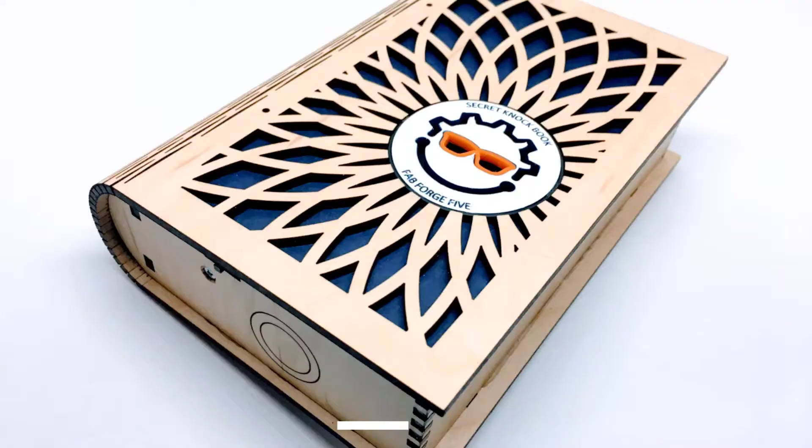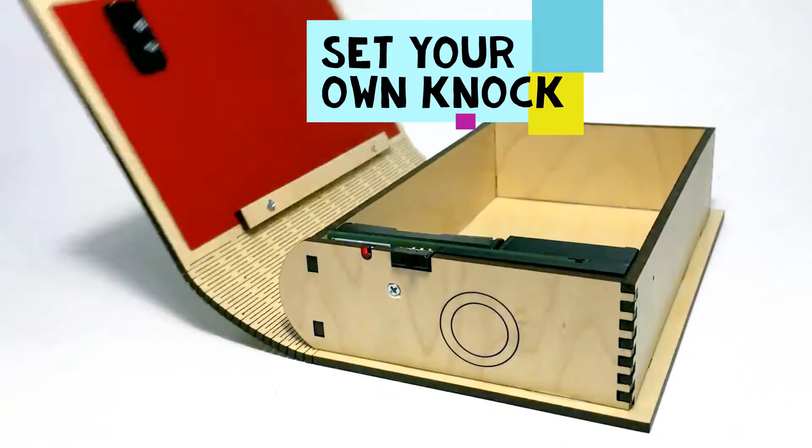We'll start a new project today. It's a custom-made secret knock book. It only opens when its user taps their custom secret knock. It has a lot of different aspects to it: 3D design, 3D printing, laser cutting, custom printed circuit board, electronics assembly, and some programming. It all comes together, I hope, in a really cool project to have some fun with. We'll see how it works. Stay tuned.

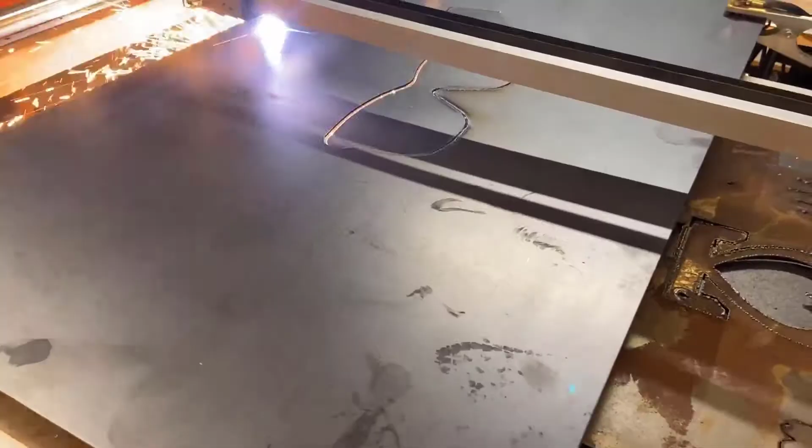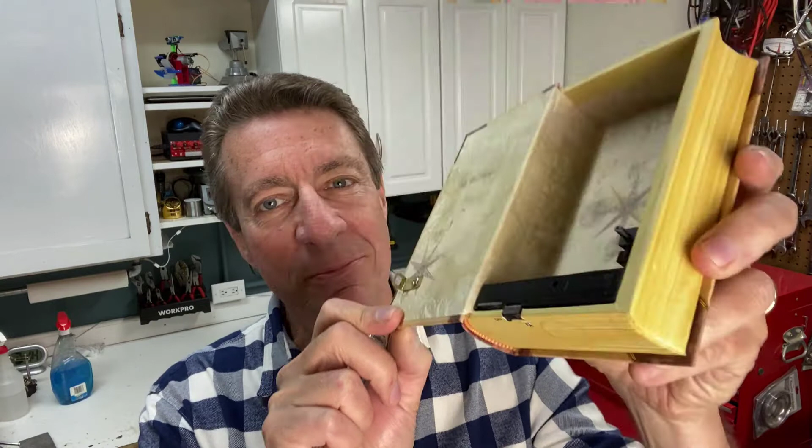All right, I built a prototype of this a while ago. So here's how it works. This is a book box I bought at a hobby store. It's got our secret knock mechanism inside it, and it works like this. There we go, it just popped open. It only opens when the latch allows it to. There's a mechanism inside it that we'll talk more about in a bit. It's battery powered, Arduino microcontroller, and it works great.

The problem is this box at the hobby store was a limited edition only. I could only buy a few of these and then they're just gone. I can't find them anywhere else. So we need to redesign our project to fit inside our own custom box. Also, to fit this box, it was a little bit tough. I had to make this small custom 3D printed battery holder to hold 3 AAA batteries, and it just barely fit, and it was tough to build this and make it work reliably every time.

Not the best thing if you want to make a bunch of these for friends and family and for different customers. So we'll redesign it and we'll have some fun. We'll see how it works. Let's get started.

Here's a look at the schematic for our secret knock book. It's pretty simple. It has an Arduino Pro Mini here, which listens for a tap or a knock with the piezo disc. It's got a small resistor here to condition the signal that comes from the disc, and then that goes into an analog input on the Arduino. It just listens all the time, and when it hears a tap or a series of taps, it decodes them to see if they match the pre-saved actual knock.

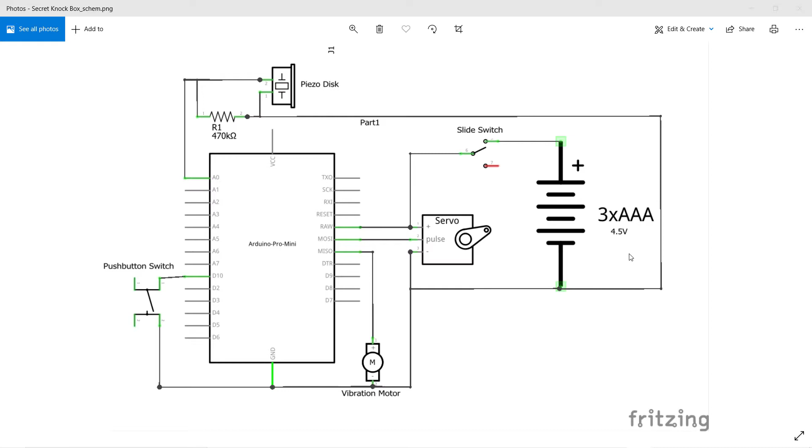And if it matches, then it turns the servo here to move the latch to open the cover. It's got a small vibration motor to interact with the user in a couple of different ways, which we'll talk about. It's also got a push button switch, which allows the user to program their own custom secret knock. And then it's got a power switch here, a little slide switch. And then of course it's powered by 3 AAA batteries for 4.5 volts. So pretty simple. So let's switch over to Fusion 360 and we will start working on our printed circuit board.

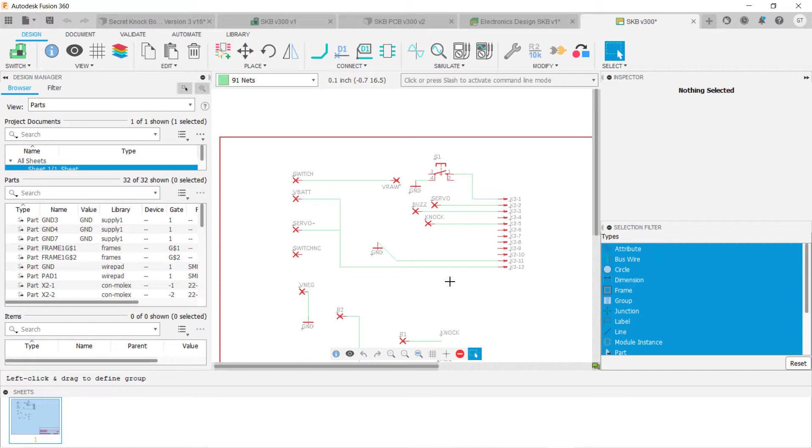So here's that schematic in the electronic design version of Fusion 360, which is also known as EagleCAD. So pretty simple. In this case, we're designing a printed circuit board that just has a number of solder pads on it that will connect to the different parts we just saw in our schematic. No actual parts mount on the printed circuit board. Well, I'll explain that more as we go. But here's the schematic, and then here is the resulting printed circuit board.

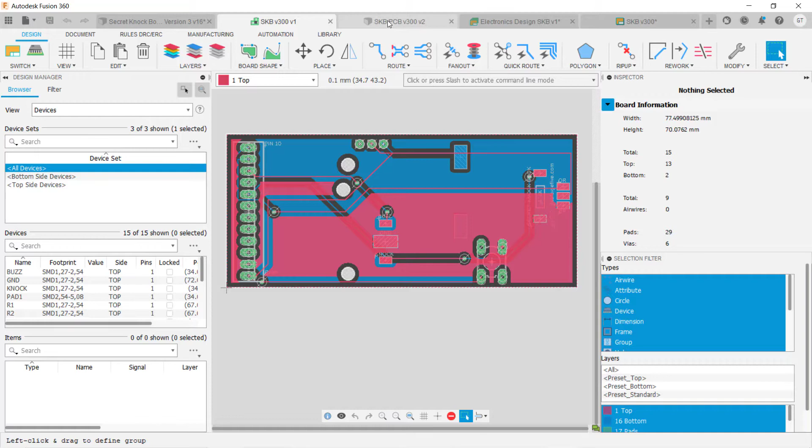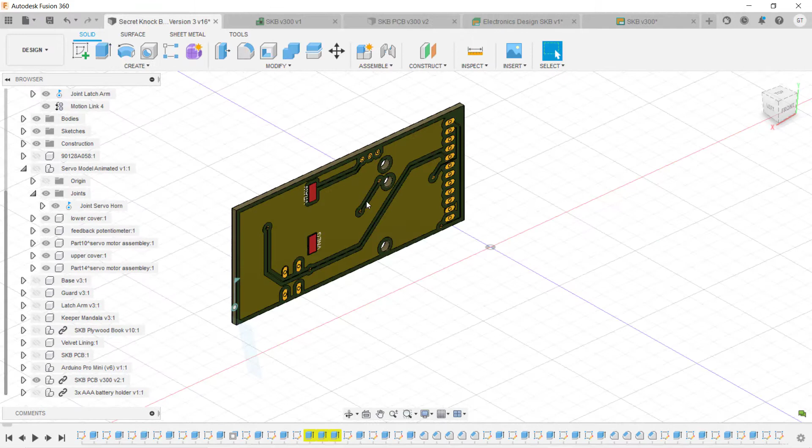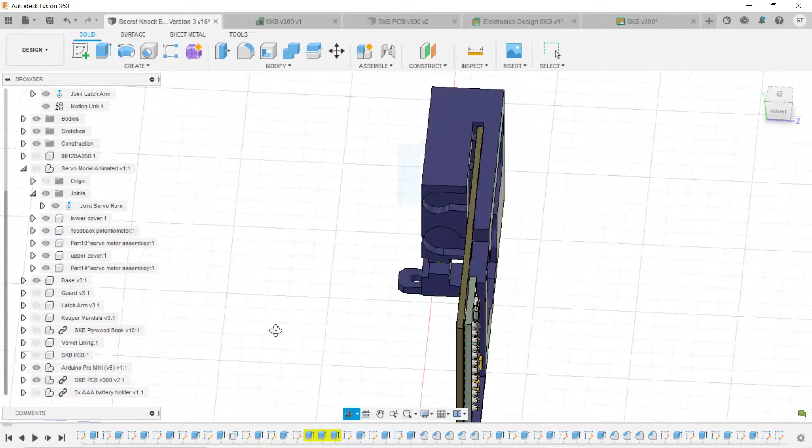So now let's take a look at where we put this board in our overall design. So we'll switch over here. So here's our printed circuit board. Now it needs to fit inside a holder or a base, which looks like this. This is a 3D printed part. The printed circuit board slides right into it. And then we have our Arduino Pro Mini right here. So it solders onto the printed circuit board and fits in this little space right here.

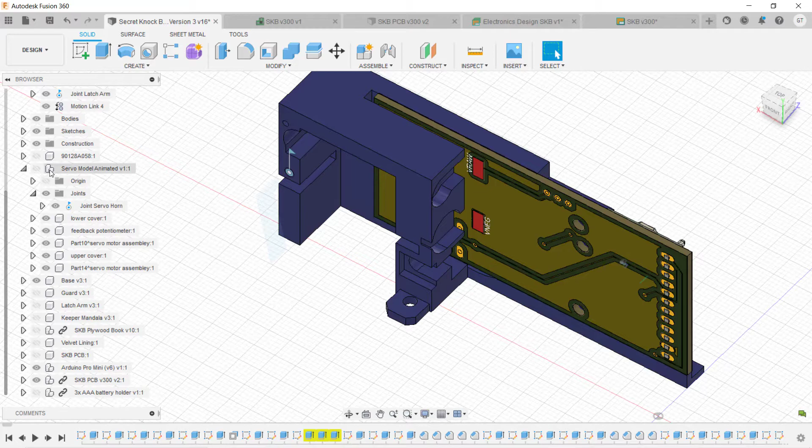Now, one thing I did when I designed this overall circuit is I'm only using pins on the Arduino for one row of connections. I don't need to use a second row. It actually saved me a lot of heartburn from adding a second row of connections on a printed circuit board. So the Arduino fits right in there. And then if we look at the different parts, let's see, for example, where our servo fits. So we'll use a little sub-micro hobby servo that fits right there in that space.

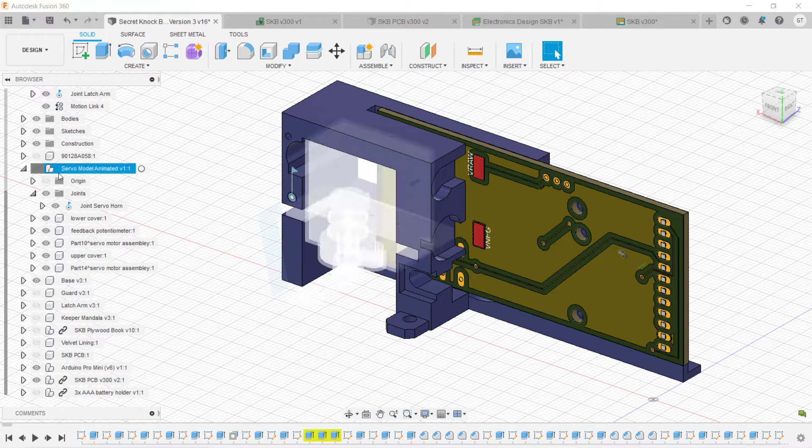And by the way, when you're designing something complex like this in Fusion 360, notice that this servo space has got a lot of little features to it, a lot of little tabs, etc. And so one great way to do that is to use the combine function.

Watch my video on the combine function to see how easy it is to carve out a void in a part using the volume of another part. It's actually really simple. So we also have a small latch arm here. That latch arm is what the servo moves and lets our book pop open.

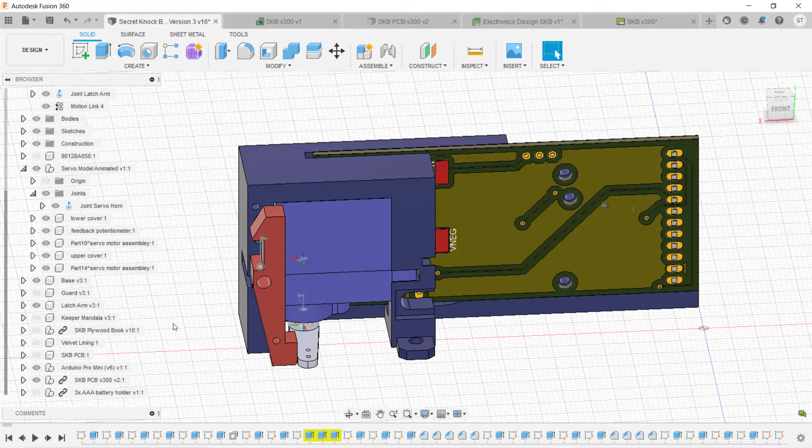And then because we're sitting at the bottom of our little book box, we also have a guard that fits over that. Just in case someone puts something inside the box, we don't want it sliding over and getting stuck inside the servo. So that stays there as well. Let's see. That's all the main key parts of our overall box design. So let's see how things move.

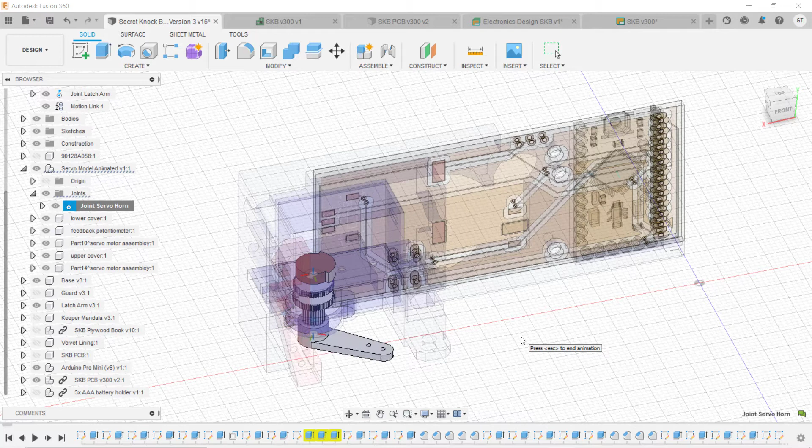So first we'll go to our servo horn and let's move this joint. So you can see that's how the servo horn moves as it spins. So there's its unlocked position, there's its locked position. All right, now let's go to our latch arm. Let's see right here, animate this, and you can see that the servo horn pushes that latch arm like this. When it unlatches right there, it allows a small metal bar to pop up.

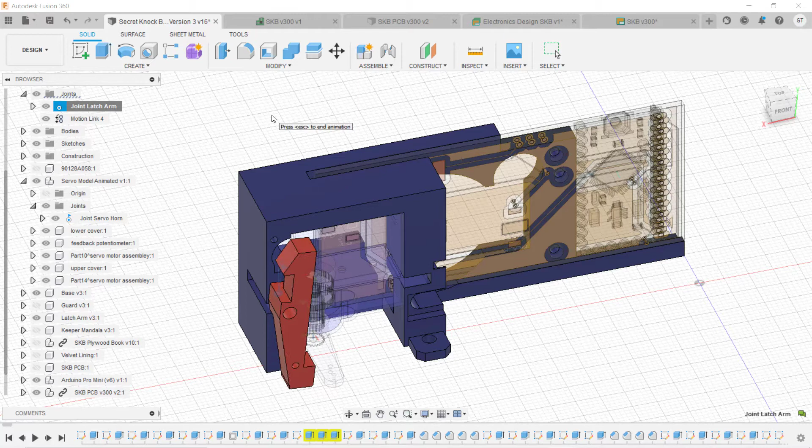All right, so now let's see how those work together. It's kind of fun in Fusion 360 to combine movement like this. So we'll say animate model. Now you can see how they move together. Not perfect, but you get the idea. All right, so that's our assembly.

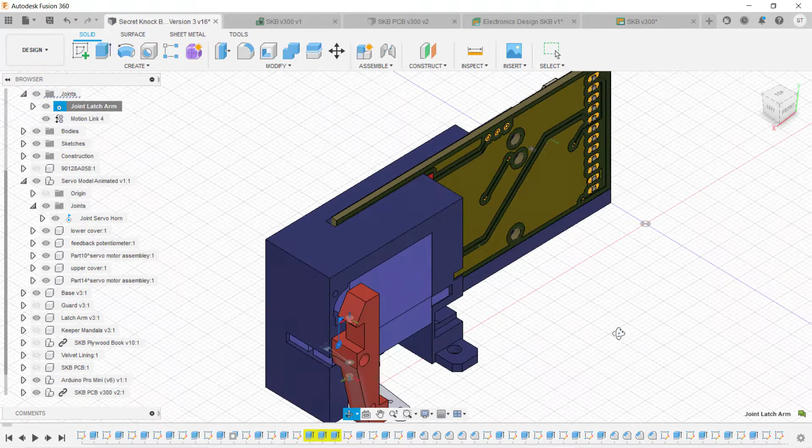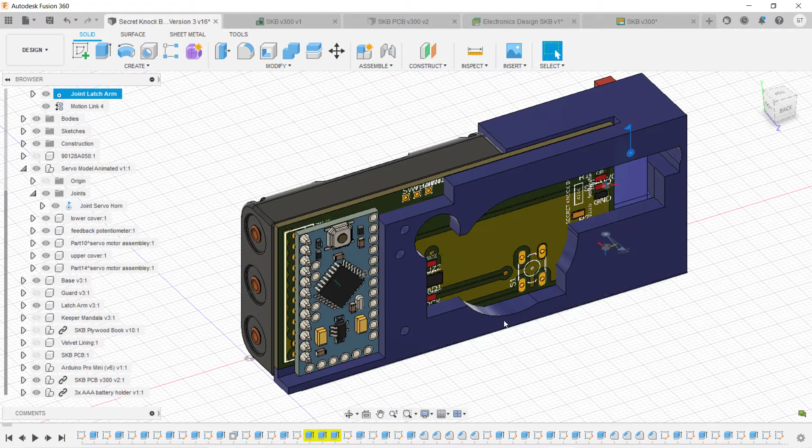Now I also have, of course, our battery holder. Fits right there into that nice little space, and it mounts with 2 screws through these 2 holes. So overall it looks like this. Now I haven't added to this model some other parts. I've got my little vibration buzzer that fits in this space. The piezo disc fits right here, and then the push button to program it fits right in this space and solders onto these 4 tabs.

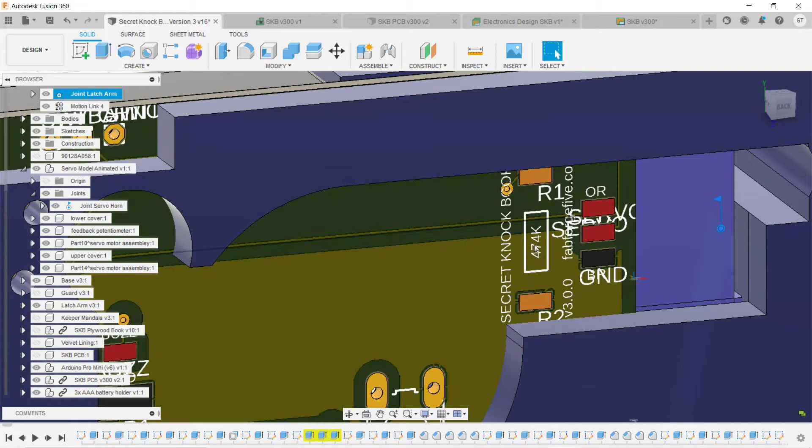And then we've got a bunch of different connections here. Our little resistor fits right across these 2 contacts, and then our servo connects to these 3 contacts. So we have some soldering space inside there. You'll see how it all fits together when I start showing you the actual parts.

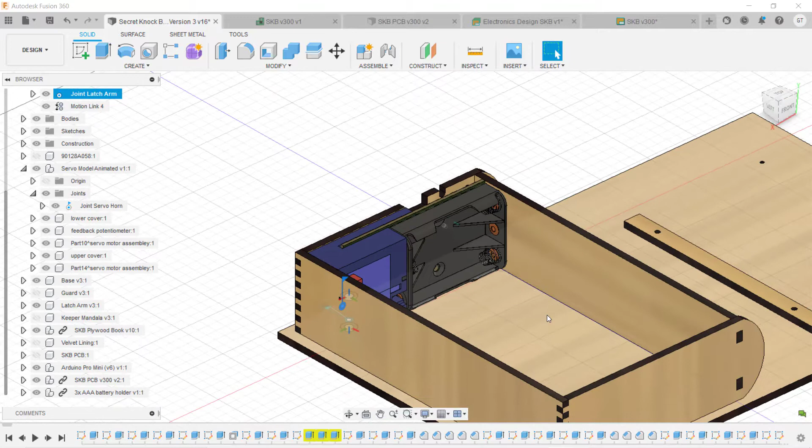Now we have to have a book for this, or a box. So we'll make that out of plywood, and it looks like, let's see if I can find it, like this. So here's our plywood box. So you can see exactly where the overall assembly fits, right there in the bottom or back of the box. So there's a space or notch for a power switch, a little window to see the flashing light on the Arduino, and a mounting hole to mount everything together. So that's how that fits.

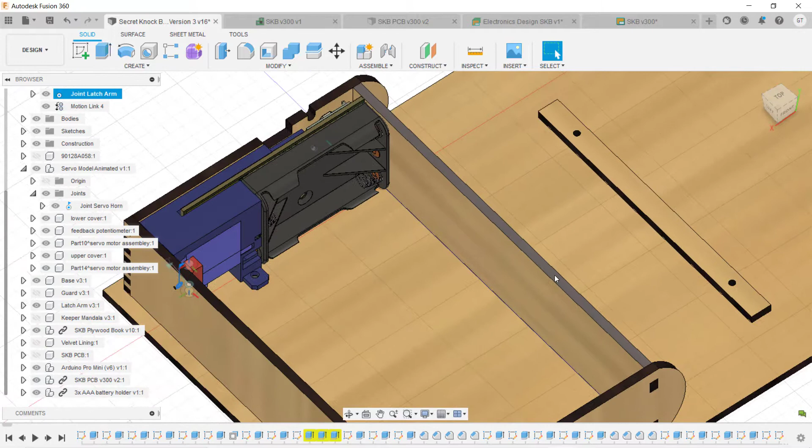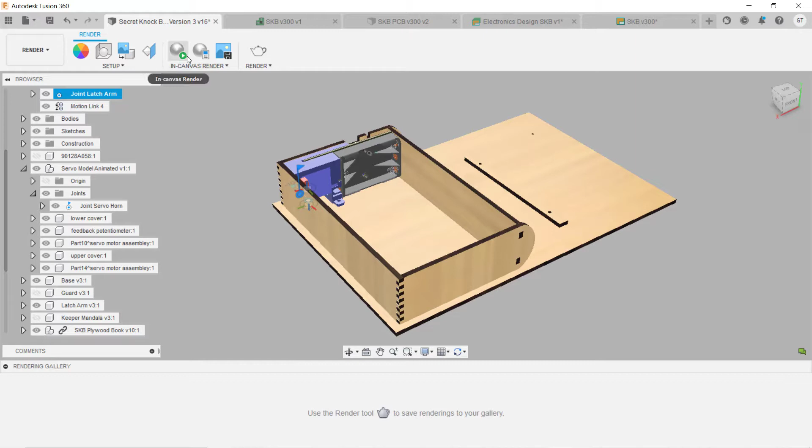Now another nice aspect of Fusion 360 is you can do photorealistic rendering. So let's do one very quickly of how this overall assembly looks. So we'll say render. That's about right there. And then we'll just start the in-canvas render process. This will just take a few seconds. You'll see it run through a bunch of ray tracing iterations as it solves the light and appearance issues.

And here's our rendering. Looks pretty good, looks pretty realistic. Gives us a sense of what the overall box will look like and how things fit. So I use photorealistic renderings all the time. I use them to upload an image to a website, to show friends or family what I'm working on, to show potential customers what the product will look like, and even to show potential investors what they might be investing in, for myself or for clients. So I highly recommend photorealistic renderings. They are great.

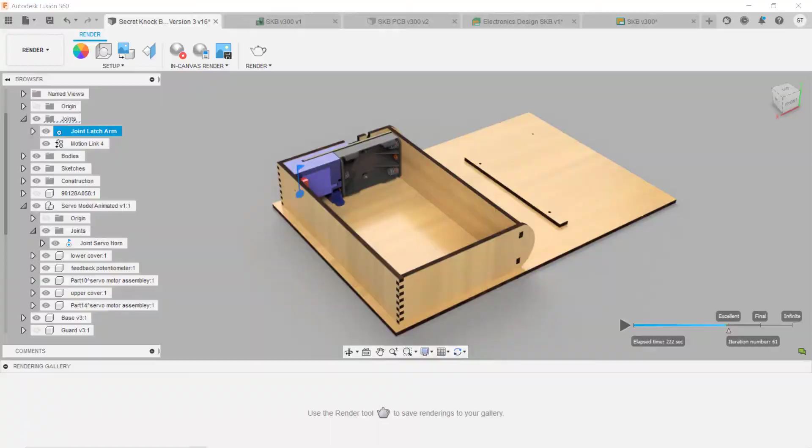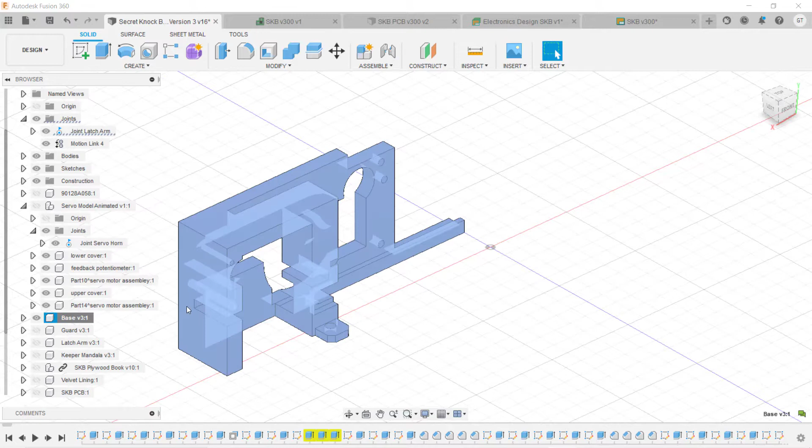So our next step is to 3D print our overall base here. So what we'll do is output an STL file. Our base looks like this. Fairly complex, but we can 3D print this, of course. That's the beauty of 3D printing. And so we'll just save that as an STL. And we'll open that up in our Prusa slicer and begin slicing this.

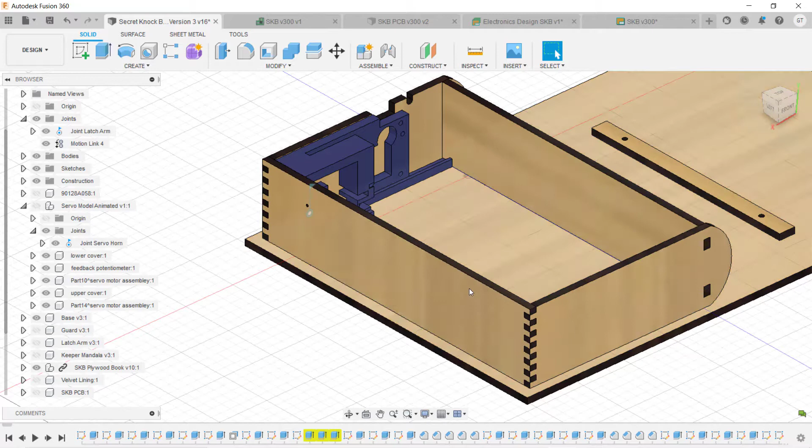And then the second step with our plywood book is to output a DXF file of each piece of this book or base. And then we'll use that DXF file for our laser cutting. That'll be the second step. We'll take a look at that as well.

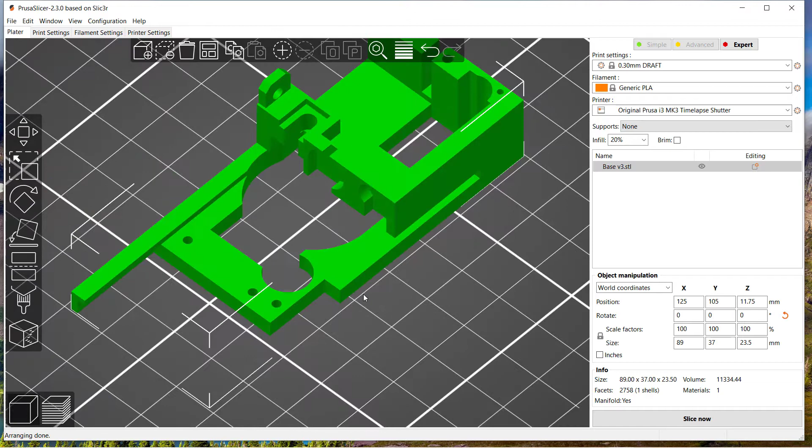Here's our base in the Prusa app in the slicer. So you can see that we definitely have some overhangs where there's nothing underneath, and since a 3D printer builds from the bottom up, we need to add some supports or scaffolds to help it build that. So let's go to our print settings. We're going to say 0.3 layer height. We will change these to 0.2.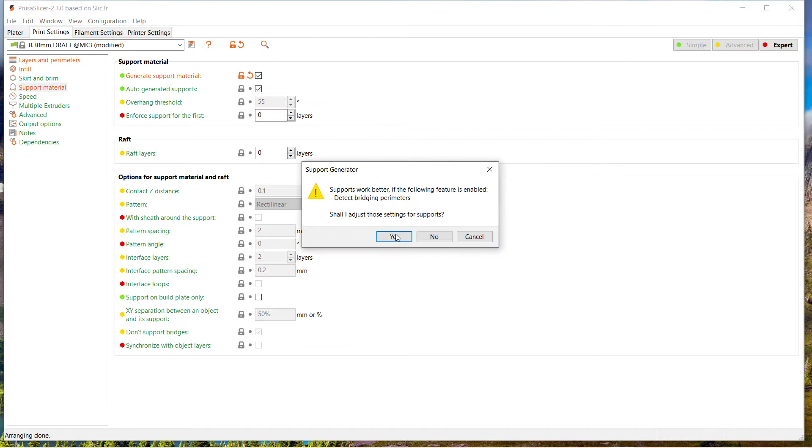I don't need a lot of horizontal shells. And then our infill, we'll say 20% is fine. I always like cubic, which is one of the nice things you can do with the PrusaSlicer. We don't need a skirt or a brim, but we definitely need support material. So we'll click right there to enable that. And there we go. Let's slice this, see how it looks.

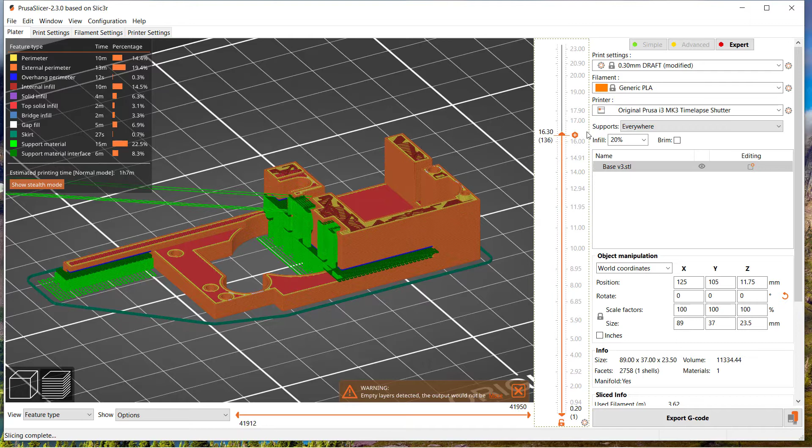There it is sliced. So we have a total of 180 layers, quite a lot. You can see how it will build itself out. Just like that. So we'll export this G-code to our 3D printer and crank up our Prusa.

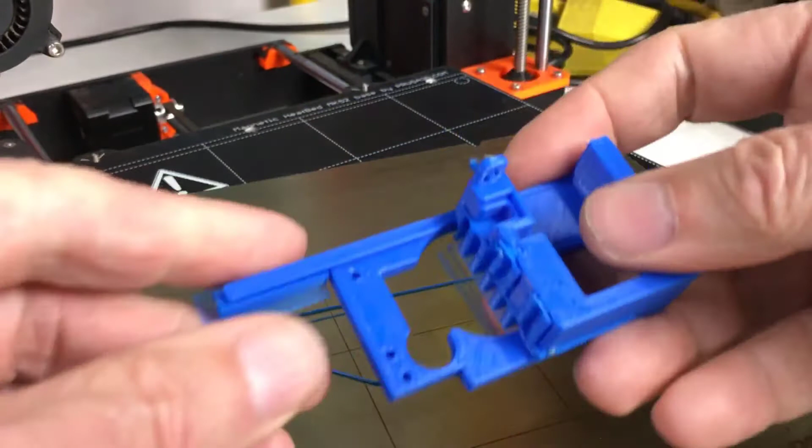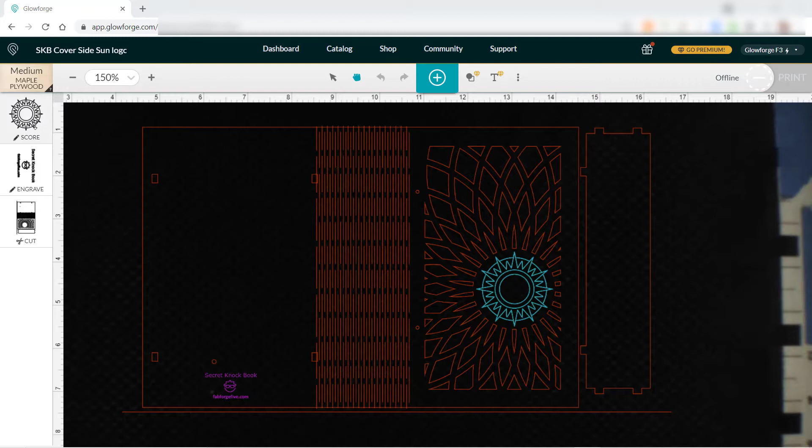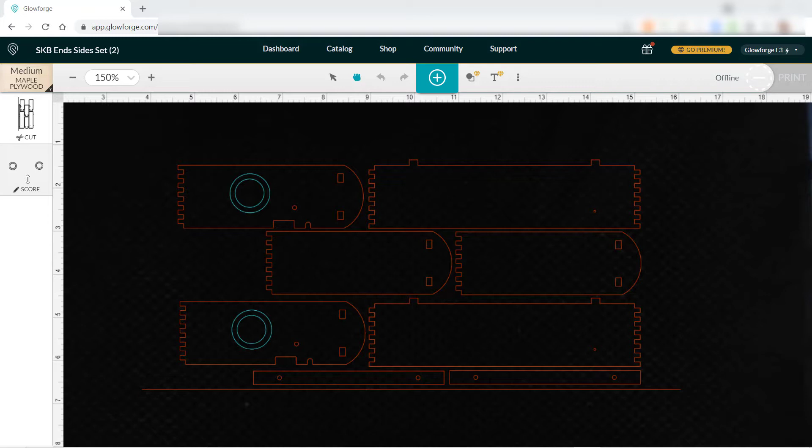And here are our ends and sides in the Glowforge app. I have enough room on the remaining sheet of plywood to make 2 sets of ends and sides. So I'll just go ahead and do that instead of wasting a piece of plywood. So here you can see these are cuts and these are scores. Those 2 circles are kind of the ideal target place to tap your secret knock. So I like those to be on the bottom ends. So we'll go ahead and cut these as well.

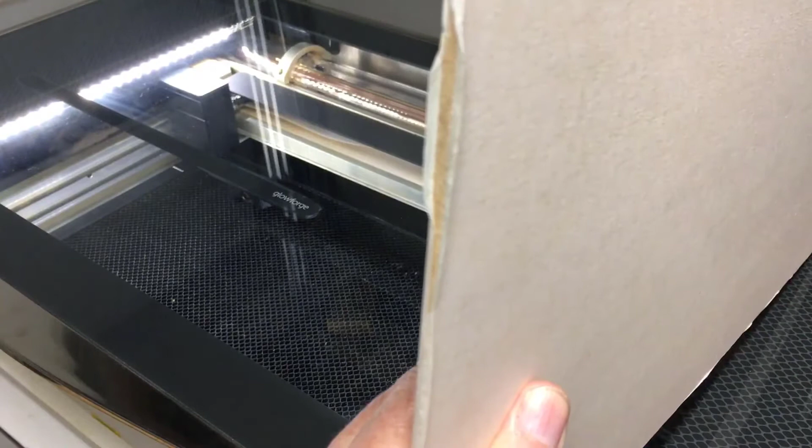We'll use some maple plywood for our laser cut wood for our case or book. And this is Proofgrade plywood from Glowforge. The nice thing about this is it has a paper backing on both sides you can peel off. That's important if you don't want scorch marks on your wood after you've laser cut it. When you peel off the backing, it makes a nice, clean, crisp laser cut. You might want scorch marks if you want something that looks rustic, and that's just fine, but I prefer to not have scorch marks. So we'll load our Glowforge and start the cut.

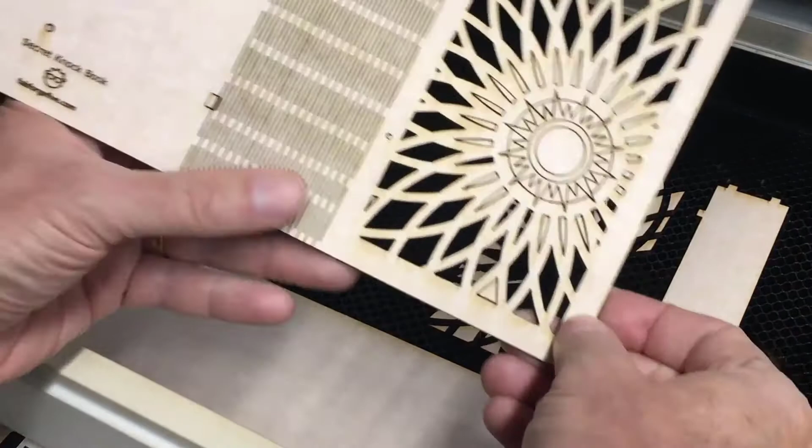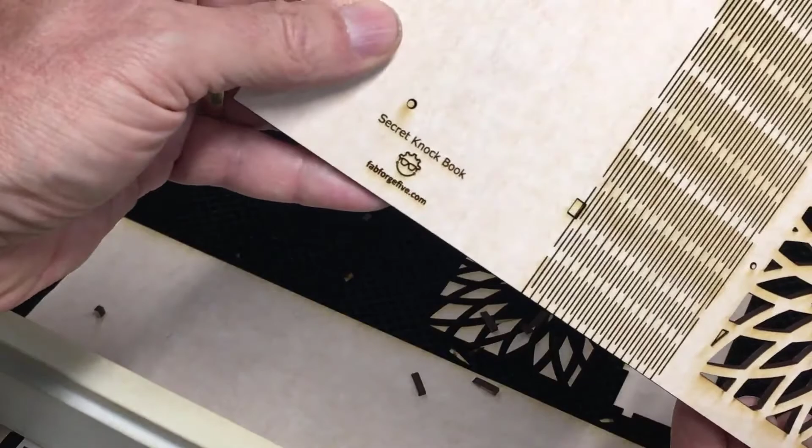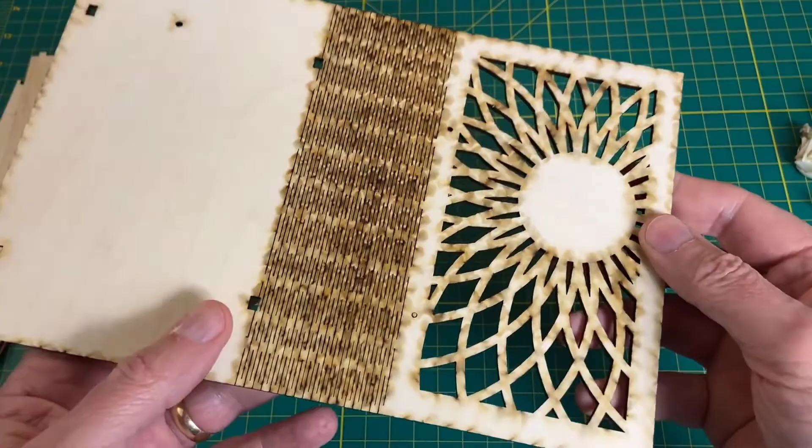Last piece to peel off. Take a quick look at the scorch marks on the paper backing here. You can see if we didn't have our paper, those marks would be on our plywood, and it's even easier to see on the bottom side. That looks actually pretty terrible, but when we peel off the backing, it will look nice and crisp. So this is the one that takes a bit of time to peel off.

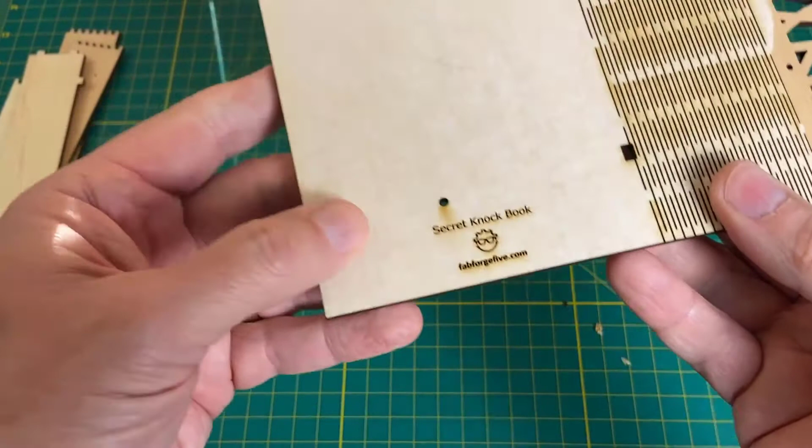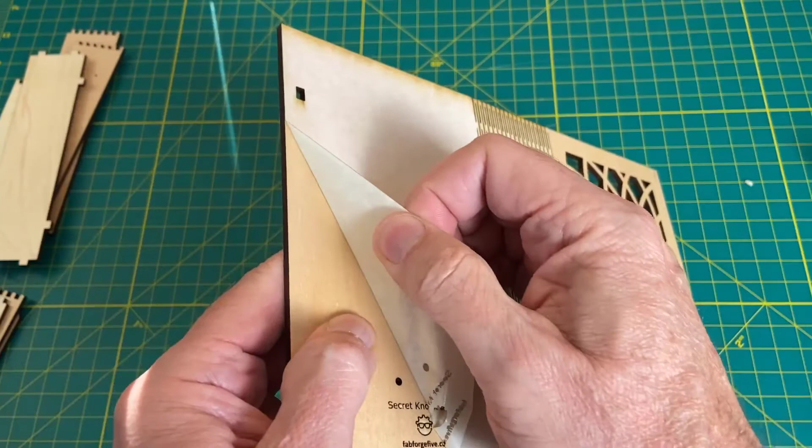Let's see, got some nice crisp edges here. I really like that. There's our engraving. We'll see how that looks when we peel it off. Looks pretty good. Now, this is the part that takes a bit of time.

How long is this gonna take? Just a few minutes. I don't have all day. I know you're busy.

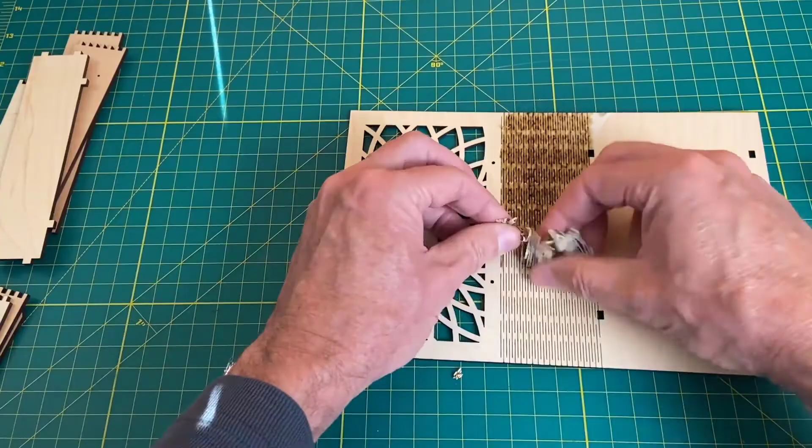That's the end result. And we'll peel off the back side. There we go, that's the back side. So here's a nice, great example of a flexible plywood hinge. And it's still got some spring to it, so the lid will spring open when the latch releases it.

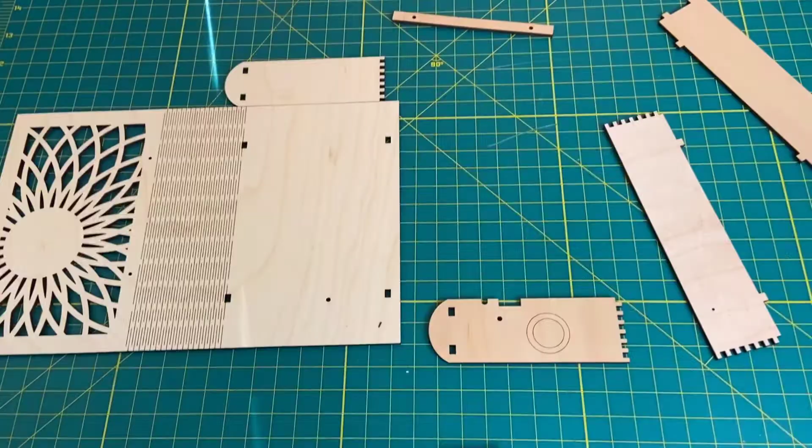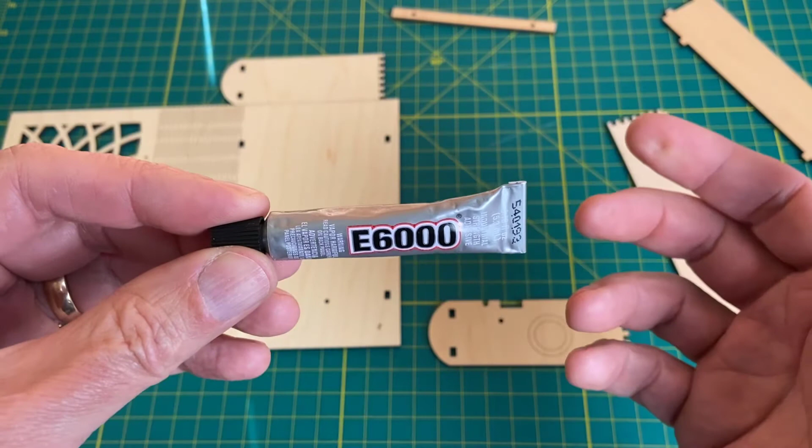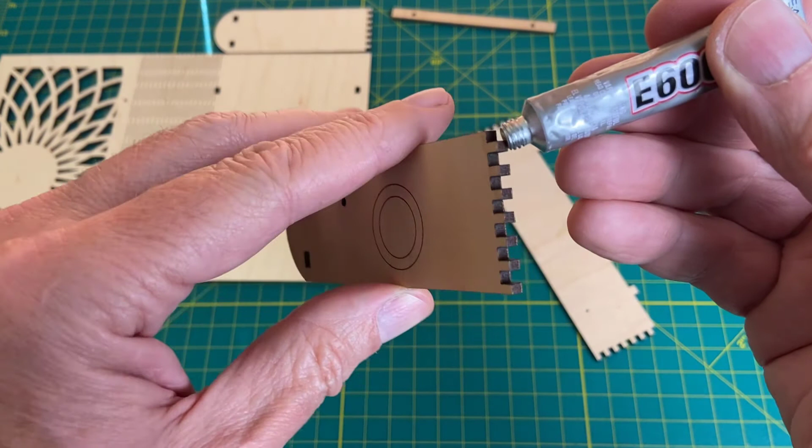Let's glue it together. I use E6000. I love this stuff. It sticks to almost anything, but still stays a little bit flexible. And so if you absolutely have to, you can pull something apart, but otherwise it's permanent and it just works well. First we'll glue our ends and sides, then we'll glue them onto the cover.

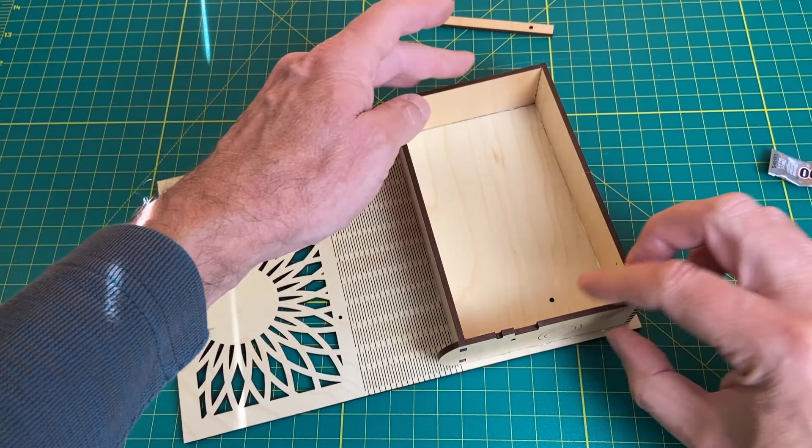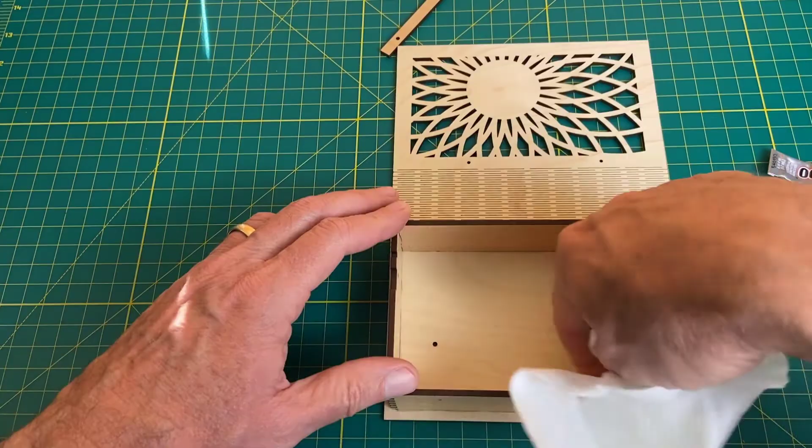This is one of the benefits of designing something in 3D CAD like Fusion 360 first. It just fits. All the tabs are in the right place. And you just know it will work. Wipe off the excess. Here's our book.

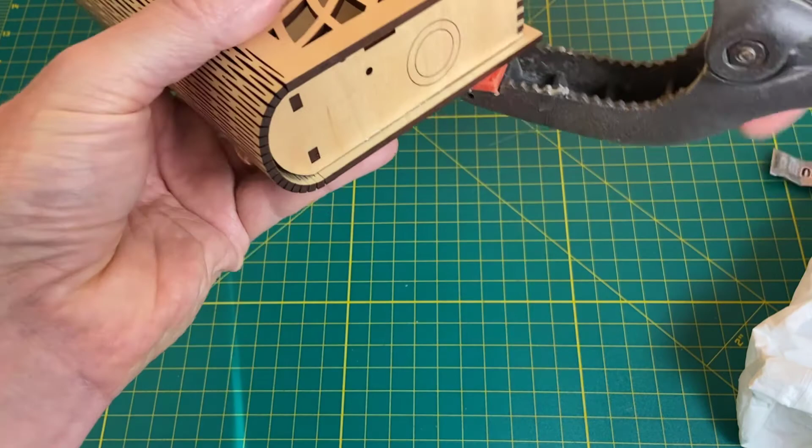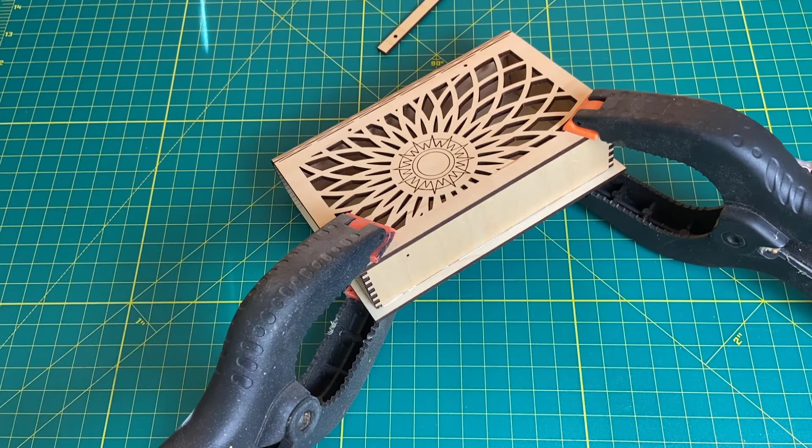Now, I like to clamp this closed when the glue dries. Make sure everything's connected. Yeah, that's good. I'll let the glue dry for about 30 minutes. All right, the glue is dry in our box. Looks nice.

All right, we're out of time for part one, but we got a lot of the stuff done this time. We're almost there. So in part two, we'll finish up our book box. Got a few things to add to that. And then we've got our custom printed circuit board here. We'll solder our electronics onto our printed circuit board, including our Arduino Pro Mini. We'll start integrating this with the 3D printed parts we made. We'll put everything together and then we'll test it and see how it works. Hopefully it'll work as well as the prototype, but in our nice, new, beautiful plywood box.